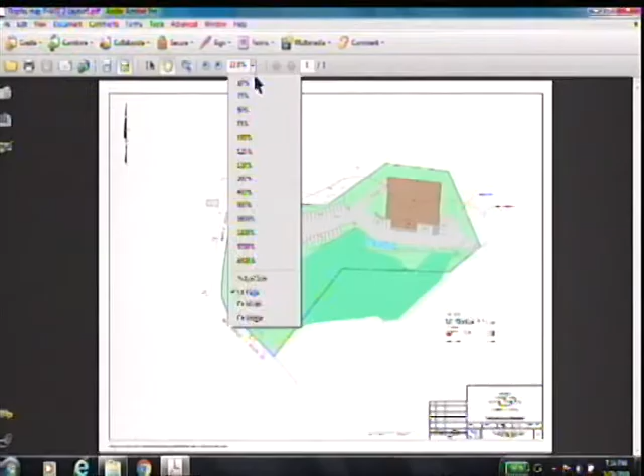What we've prepared is this plan, a very rough schematic of what the proposed building would look like. Again, this is the existing building, the shed, and the pavement goes to this point. Last time we were here, we continued the driveway from here over to the existing road on the Kimball property.

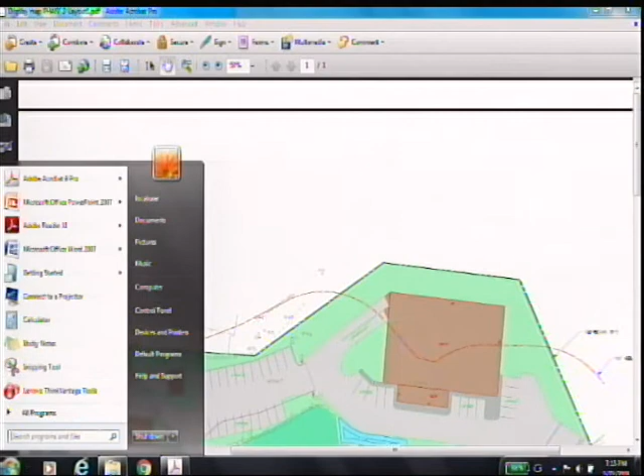I think it's phase 1. Oh, what do you -- sorry, you want me to do it? Okay. And leave the other one over. Okay, so this is phase 1, which would be a driveway following the location as dictated by the building.

What we'll propose doing is we won't do the parking this time, it's not required, that's only part of the second building. We will build this driveway and it will be used in final, but to the extent that this will be only the first course. What we're proposing is sheet flowing the runoff from the road into this water quality basin here, and then the rest will reverse the pitch and put it into a water quality basin here.

The preliminary indications I've done for detention show that by converting this area from the 1984 conditions, which was primarily a dirt driveway with rock outcrops and very little vegetation, to what we will be putting in here, which is grass, the detention is not a problem for the first phase. So again, these will be water quality basins.

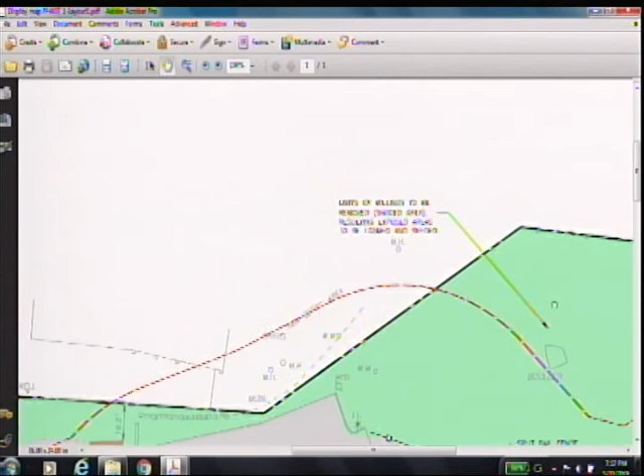The millings we're putting here will be removed, and the exposed area will be loamed and seeded. There will be no parking or outdoor storage in this area. We will put a split rail fence along the northern side to prevent anybody from inadvertently going onto the grassed area.

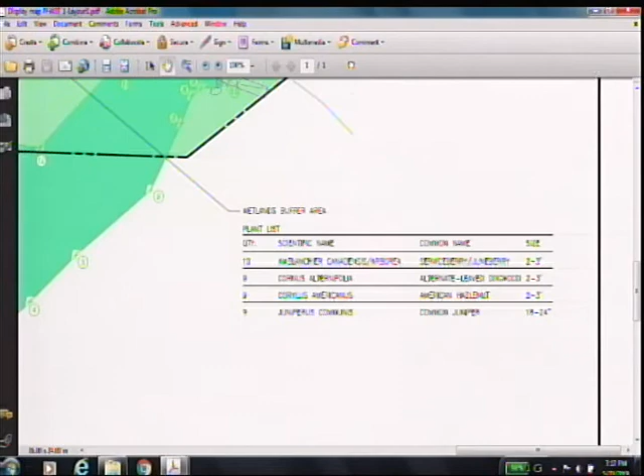Now, this is obviously not complete, but we had Cynthia Rabinowitz come up with a list of wetlands buffer plants that she is proposing to put in there. We will be back at the next meeting to finalize this plan, to have these sited on the wetlands buffer, with the rain gardens properly planted, and a finalized plan.

This again is the phase one plan. What you had said at the last meeting is if this building is not under proposal or construction within 3 to 5 years, we wanted more plantings in here, particularly along the split rail fence. So to this area up here, we will add the 5-year landscaping plan.

Again, this is something we do not expect to be built or planted yet, but we will be coming in with the building, and when we do, that will have its own total landscaping plan. So again, we're not finished now, we have not begun the soils testing required or completed the other work for the building. But what we have come in with is a plan that will be a 3- and 5-year planting plan for the site. What you're seeing here is the initial planting.

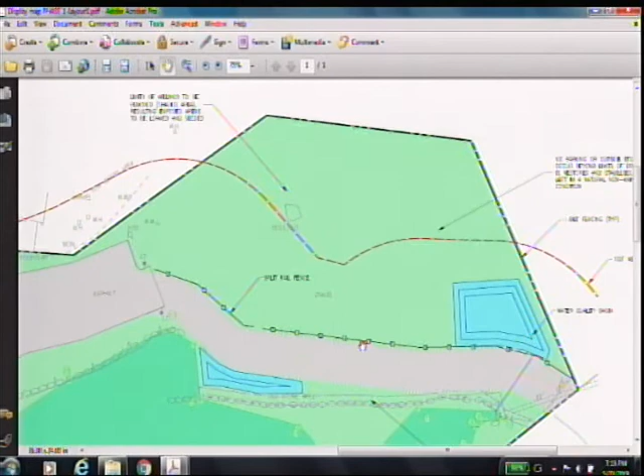Is there any question? The driveway from the asphalt to that area there, what's that material going to be?

Yeah, it'll be a regular structural section. It'll have most likely a bank-run gravel bottom to it, and then one course of pavement, because this is pitched this way to here and pitched that way to there.

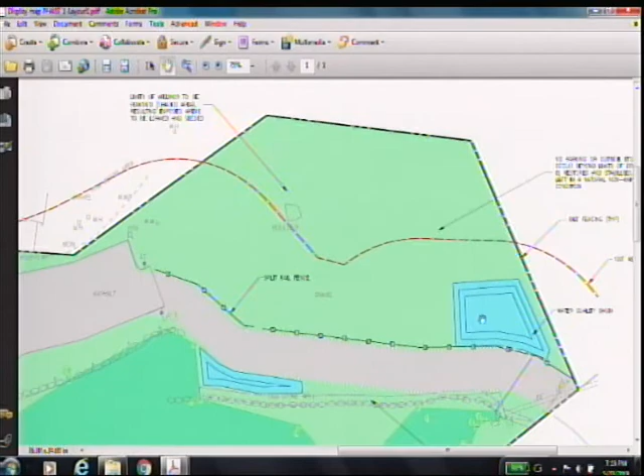This basin will be under the parking lot, so we'll have to get detention for the building. So this would not be utilized for water quality. We will only put the one course in. When we come in with the final plan, we will level this to make the drainage work to get into the detention system and so on. But this will be quite sufficient for the needs - there's not that much traffic on it.

Sorry, could you just take a step back again? You said that for this phase, that sediment basin isn't going to be used yet? This one? No, these two basins will be used with the construction of this driveway. They are water quality basins - more than likely rain gardens or thereabouts.

We will pitch from this driveway from here to here into this one, and then from here to here into that one. There is an outlet pipe that'll come out here and join the riprap at the end - there's an existing 30-inch pipe coming through here, so we'll use that energy dissipator there to take the flow from the water quality basin.

What kind of vehicles would be using this driveway? Well, primarily, it's going to be employees of the facility - which is O'Keefe Controls. But the new building, is that what you're saying? That's going to be the same, for the same use? Yes.

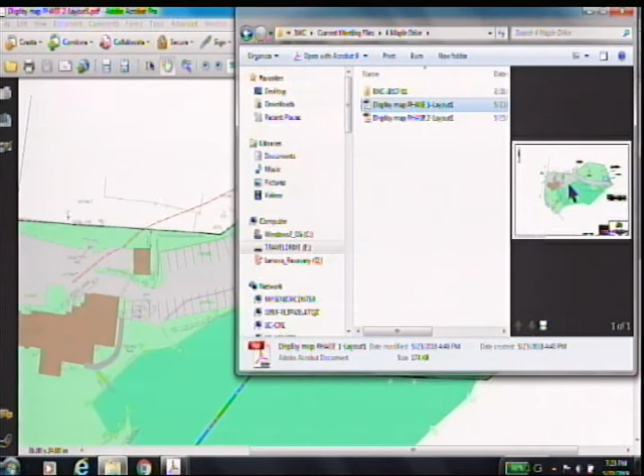So that's the long-range plan, this is, right? Yes, which may or may not happen. It might happen a year from now, or 10 years, or it may never happen. What we're looking at is what you want to disturb and impact today. And that driveway, when you go in to do your other plan, can be moved at that point as part of your next phase plan, maybe to this location. But I don't know why we need to have it right up against the wetland now when it doesn't need to be.

Is it reasonable to build it only once and not build it, then rip it out and build something similar? Well, you're going to put a huge building on there later. There's going to be a lot of earthwork, correct? Not particularly, I mean a lot of subsurface, you're going to be doing a lot of digging. I mean, yes, but it's still a relatively level site with a flat building on it.

I'm just trying to wrap my head around understanding why we should consider a development or the impact to the upland review area right up against the wetlands when we don't have to today. We don't know when that future phase is going to happen.

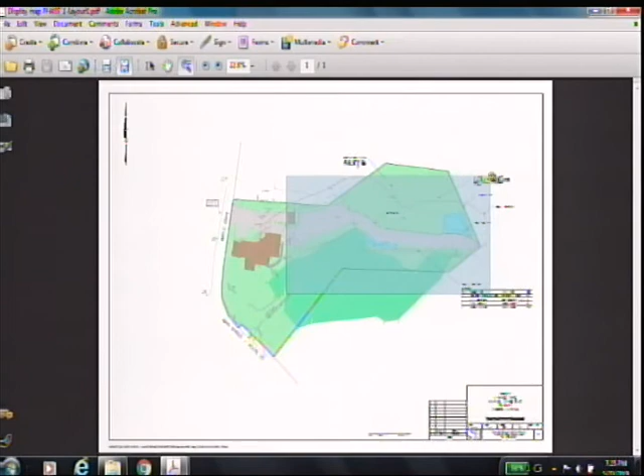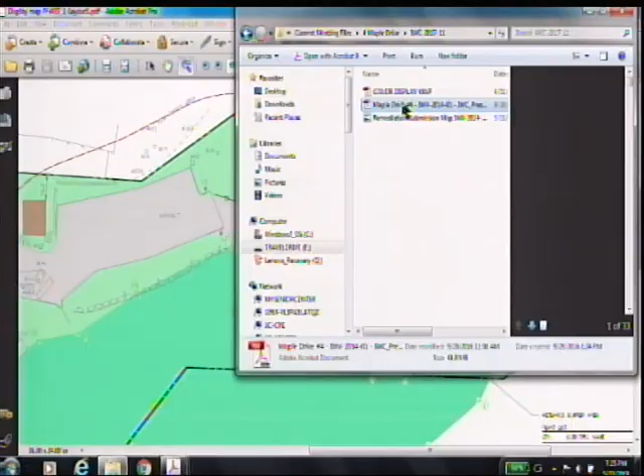Do we still have the pictures of the current condition, was it the last meeting or the meeting before that we looked at those pictures? The photographs, the original pictures showing what it looks like now? Yeah, okay, so was that, can we look at the pictures of where that rock wall is and where the millings are? Yeah, I had those pictures right there on my flash. Oh, you had them, okay. Were there pictures with this?

Let's see, yeah, there's images. There's no ground level, but we could look at the aerial. That is that one right there. So there's your answer, driveway from the other — that's where the driveway's going to start. It's already there.

This is all millings that have been placed in there that we're still proposing. Right, well, that's the violation. The millings were placed there, yeah. It's a violation, right? Right. Well, that's what we're here to remediate. When did you buy the property?

This is the wetland area in here. This is a boulder retaining wall in here. On the downhill side of the boulders, which I have photographs of, this is all multiflora rose all through here and into the wetland. So how much are you moving the new proposed driveway of your phase one project from that milling driveway right there? None at all? No, we are — it is going to come down here more. I would say half the driveway width is going to be closer to the wetlands than what exists there now.

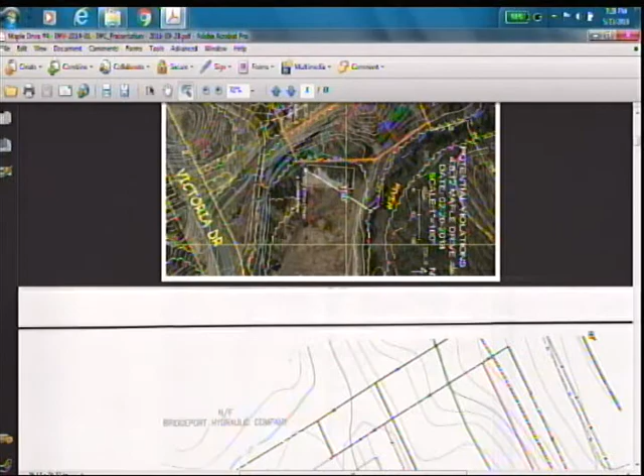Let's see, 2014? IWV 2014-01? Yes, probably January-ish, it's the first one maybe. So it goes back a ways, four years. Well, we started out this thing to bring you up to speed, Jeff. No, I remember some of the discussions we've had.

So it's always been a discussion about what the future's going to bring and how to address this in a fashion that would possibly suit the owner's needs in addition to remediating the violation. The wetlands shown on that one are not the current wetlands. They were reflagged this year by Cynthia.

Rebecca, I do remember that. Is that the plans that we have, November 14th, 17th? No, if it was ours, that has the current wetlands flagging on it, but this is 3/28. Let's see this one, the driveway. No, November 17th may not be in here. Oh, we need that. Yeah, so the plans you have were the plans they came in with the last time you met. Here's the one, received April 6, 2018? Did it come in at the meeting I wasn't here at? Probably, here, take a look. Well, I think this is it.

Where's that one you've been looking at? This one's April 6, 18, that's the one on the bottom. This one you were just looking at before, what's the date of that one? That's the newest. This was the previous one. Okay, right. So you're saying, oh no, this is the one, because it's got both lines on it. Okay.

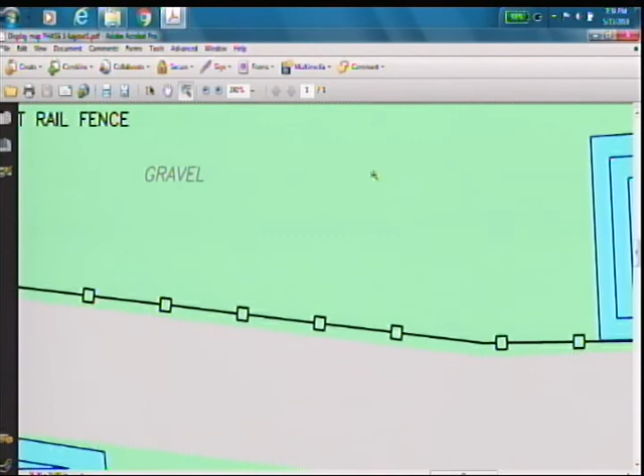Of course we have, you're in the Zoom mode, that's why. Yeah, there you go, these two things for planting grass seeds in here. Now.

That's the short term, that's phase one. Phase two would be if the building is not built and it's more than 3 or 5 years, whichever, we will propose additional plantings in this area to be done at that time, at the end of whatever time period the commission feels appropriate. Can you put phase 2 back up there again, please? I don't know, here, let me take it.

You meant phase one back. No, I just needed to see this one.

Is Cynthia also looking at, as you mentioned, behind the rock wall there's a lot of invasives, a method of enhancing? Likely you could attribute those invasives to the encroachment to the edge, allowing more sunlight and other disturbed opportunist species to come in. Is she going to look at some type of enhancement to the wetland itself along that edge to remove the invasives?

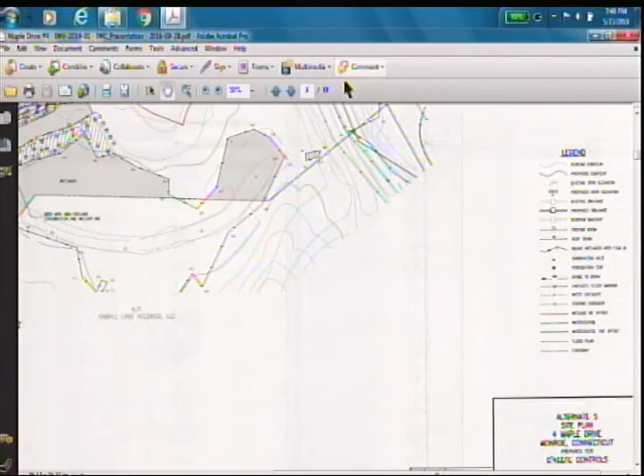And then that area that separated the two patches of wetland was a raised driveway bed that serviced the house, which was on what is now our property. Looks like that's the one we were talking about, the other corridor. Maybe, yeah.

I wasn't on the commission, correct, so my memory is, the encroachment into the wetlands by our parking lot was something less than 300 square feet. Okay? We voluntarily removed that driveway and created another 8,000 square feet of wetland. Is that what you're thinking of?

Yeah, I've seen, why do I remember a trade? If you kept something, you were able to keep something that you wanted, and in trade you put in, you took away the driveway and created wetland. Or it wasn't really creating, it was just exposing it. The trade was, what he's telling you is this area, the wetlands was filled over here, and in response to that, they created this area as a new wetland. That response was a fairly generous response.

We're talking about trading less than 300 square feet for over 8,000 square feet. I remember the commissions were not very pleased with the concept, and we needed to offer something decent, or they were not going to allow us to keep it.

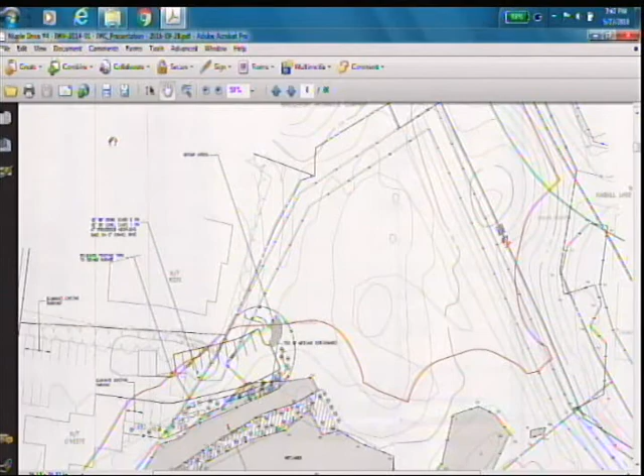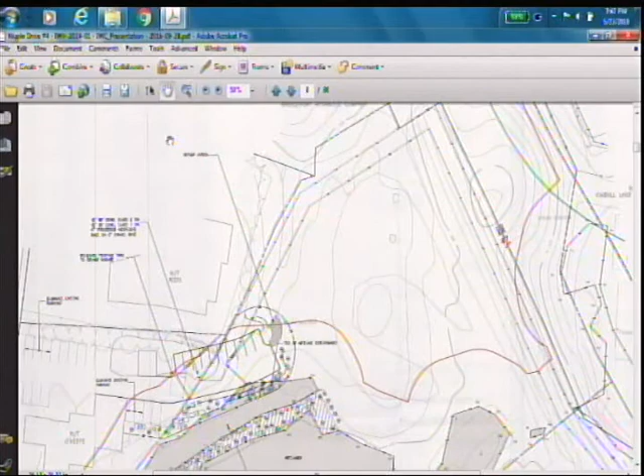This site has been used several times for different purposes, going back to 1984 when the topo was done. We have not done soils testing out there yet. I would imagine what they've done primarily is take the topsoil. I doubt if they've gone down to the B horizon, so it's just bare, no topsoil. So the idea is it's gonna be a wetland grass seed, or whatever the appropriate covering would be. So they'll have to spread some topsoil over the top to get something to grow. Then we'll see it, right?

I know I would be a lot more comfortable if phase 2 had been submitted as an application for development, because it's very hard to see what the future's gonna be. For us to say, okay, in 3 or 5 years, who knows what's gonna happen? In the meantime, you're removing the millings and planting grass, but that's not what we would normally ask for in a restoration. That's where I am a little bit more uncomfortable, because I would like to see something done now.

And if the plan doesn't happen, then at least we're covered. If the plan does happen, plants can be moved, bagged and balled, and moved to a different portion of the property until you're done with your building, that kind of thing. Now, this plan right here with phase 2 does not include any landscaping, any plantings or anything. That's there just to show where the driveway was.

I understand why that's put in, what I'm saying is there is no plan, it's all very ethereal. And I think that what you're seeing there is, you have to start with something. The first question that I asked is, can we fit a building in here which is gonna meet the zoning requirements of the town? So the answer came back affirmative.

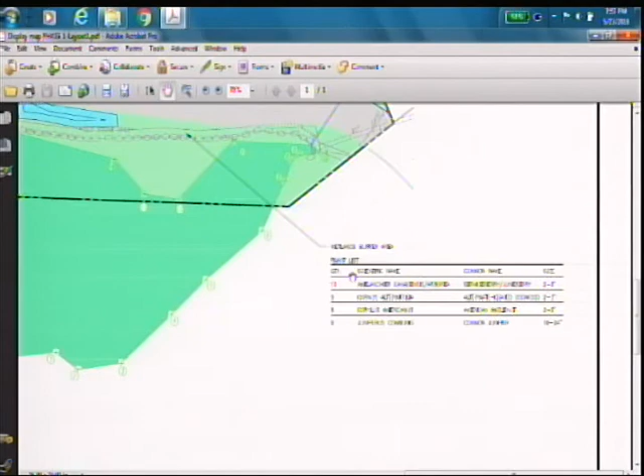Pardon me, but I just got seriously confused because the site plan revised to 4/6/18 that we have in our packet is very different from what you've got up on the screen. Yes. Now we need what you're actually proposing.

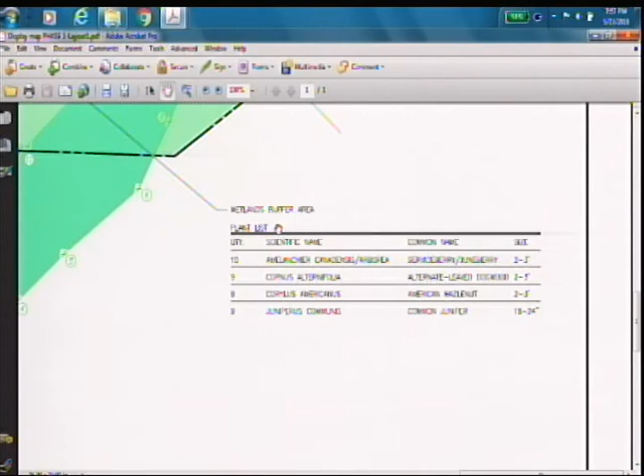No, that's what he's going to do next time. He's submitting something - we will have a different set of drawings. It's going to be different, similar to those, similar in the amount of detail, but it will be for this driveway, not that one. That had several things that Scott didn't like - he didn't like the width, he didn't like the turnout, and a few things like that. So we had to revise that.

There were a number of comments provided to the commission. It's not that I don't like things - I provided some comments, Scott provided some comments discussing the details of that plan, and we discussed it at the last meeting. So we came back and said, all right, they want a two-phase landscape plan. So we're going to come up with why we're putting the driveway where we are, and then the immediate landscaping, and then the landscaping that will be done on this site if the building is not proposed.

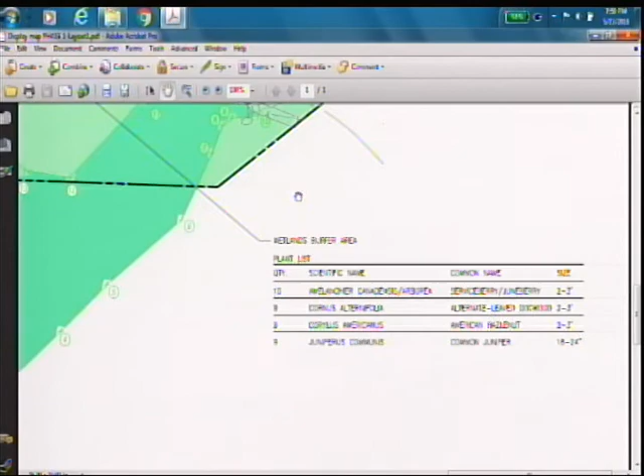Is there gonna be qualifiers, like a time frame? That's what the commission came up with. The commission's timeframe was 3 to 5 years. If action is not taken on the final building within 3 to 5 years, then the additional landscaping would have to be instituted.

This commission did that? Yes. That was the idea of the two-phase plan. I don't remember any of that. I think that was Ross.

I think it was actually Jim, to be honest, but I do remember discussing it. Wasn't it? Jim, for some reason. Was it? He's not here, he gets blamed for everything. Yeah, it was him, and it was Clark. Clark, it was Clark, he wasn't even here.

Might have been me. But that was the idea, that if we put in some plants and if they don't do anything, more was to be done up in here. Now, if the plan's built, then obviously those plans are meaningless.

I think that was a compromise that we, as a commission, came up with. I don't remember it being me, but it might have been. The applicant was discussing how they don't want to spend money putting a bunch of plants in just to be ripped out for the building. The idea was tossed around about putting plants in that they can move to some of these other spots, and that somehow led to the 3 to 5 year timeframe, maybe I said it.

I mean, the amount of time is really kind of arbitrary. I get you, I understand.

You're gonna look at the driveway width and what that really needs to be? That's 24 feet. So at the last meeting, that was the bulk of our discussion. They had a much thinner driveway with a turnaround.

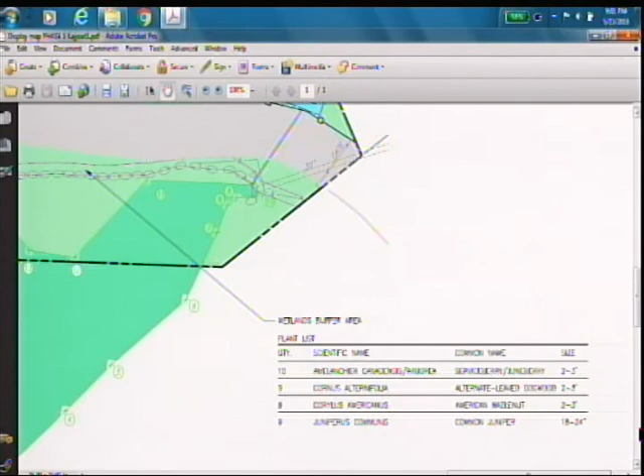And hazelnut too, well, I've never seen hazelnut on a planting plan. Again, we're talking about an area that's relatively limited to right in here. Well, again, we're going to have wetland rain garden plantings in here, so we're really limited to this area right in here.

But you're limiting it to that area. We're not limiting it. Yeah, but again, you know, the reason why we purchased this property, one was to expand our parking, which we did. The second is to be able to build an additional building so we can expand our operations into it. And then the third, which in the short term has actually been the biggest benefit, is the human safety aspect of being able to get from our parking lot to that exit driveway. And don't get me wrong, I'm not saying to push the driveway or get rid of the driveway, I'm saying you're limiting your area that you're looking at for planting to whatever thin area.

There's no reason why it couldn't extend beyond that, and if there needs to be additional plantings or enhancements up to or into the wetlands, that's something that Cynthia, as the wetland scientist, should come to us and say, due to that violation, here's what was affected, here's what we're proposing as mitigation to offset that, as well as improving this area.

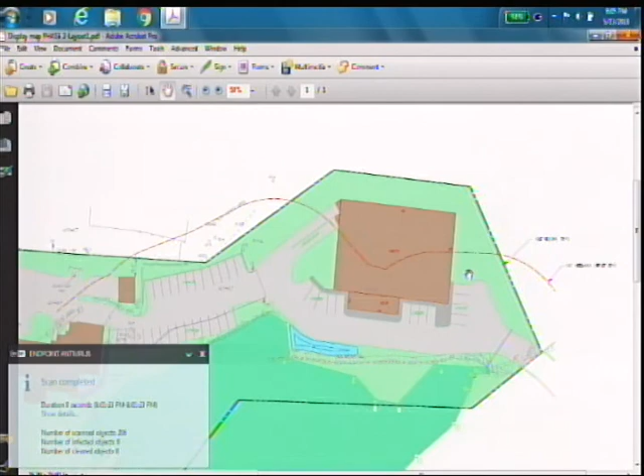I think that's what I would like to see - I would like to see some plantings in that area. I'm trying to be reasonable and work with you too, but we have the equivalent of a naked person up there, that somebody took all their clothes away, and we're trying to clothe them while we're waiting for somebody to go to the store. It's quite a metaphor. It's the only thing I can come up with at the moment. But we have a naked thing that we're left with, and our job is to make sure that it gets enhanced a little bit, while waiting, and that could be another 14 years before the building turns up. In the meantime, we have nothing that is enhancing those other areas.

I think all of this area surrounding it, especially in here and along there, can be planted now. So which plan would that be on - Cynthia's? It will be on the next plan. The next plan, the one we're going to see next meeting? Yes, not phase two - he's taking our direction, making sure that we're all talking about the same thing. And that will be part of the phase one planting, because it's compatible with the building. But the phase two planting will be most likely something along the fence or something in here, so that if the building is not built, we have something on that large area of land.

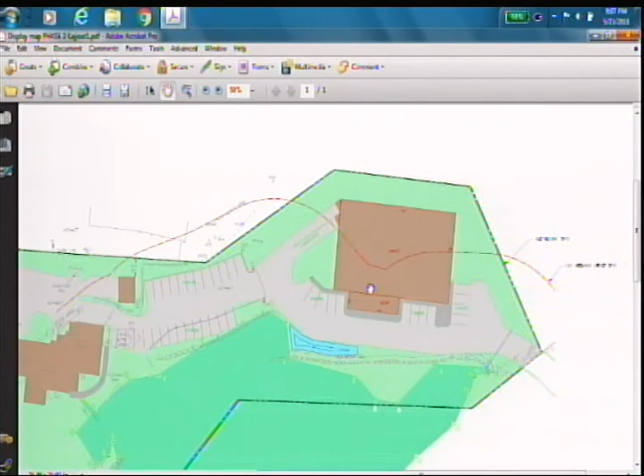Something in here would be planted in phase two, if the building is not done. Along here, this will be planted because it's a rain garden, but this area I don't really want too heavily vegetated at this point, because the only thing that's going to keep invasive species out of here is mowing.

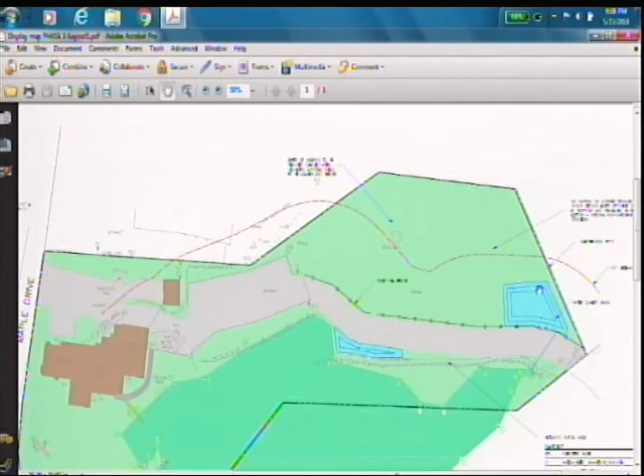We are completely surrounded by the area from here down to the bike trail. All of this area has a huge amount of invasive species, and I want to keep something in here that can be mowed to keep the invasives out. If it's going to be a rain garden or a water quality feature, it has to function as such, and it has to be planted in a manner to meet that quality renovation of stormwater.

Right, before it discharges through the pipe and directly into that wetland, which we will most likely lose when we do the next phase. But we're not talking about larger trees or things like that.

I don't think we can plant even that border with those trees and expect the shade to keep the invasives out. This area is thick. At the last meeting I had pictures showing the stands of multiflora rose, so that's the problem. Nasty stuff, no doubt about it.

And that's where a good monitoring program comes in.

So, to wrap this up, we're talking about permanent, long-term plantings in this area. This will be short-term. This will be long-term all down here and will never have to be taken out, so we can do a little more in that area, and then possibly something along the fence. But keep this as a mowed area.

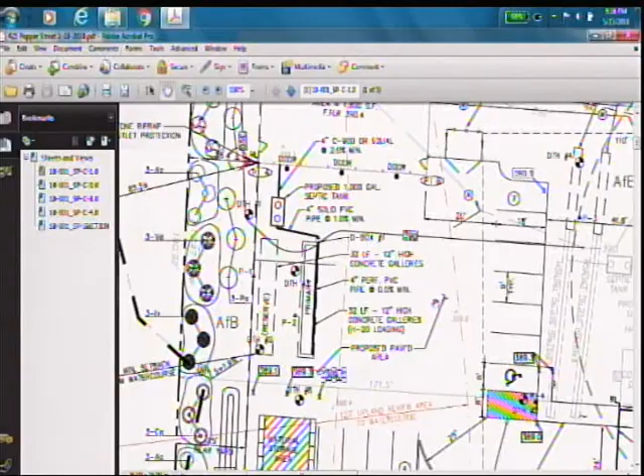Also, in conjunction with that, part of the discussion was, can we do something with the grading to get some of this runoff to actually utilize that area? We put some spot elevations, forming a high point through this area, and that's twofold. One, the concern was raised that previously we were sheet flowing this whole area down into the basin, so water would get into that material storage. So we created a high point in that material storage so we could get water to flow around that and then into the basin area.

With that additional storage, a couple other items we discussed as alternatives: Number one, I believe Mr. Stewart had suggested we put in some subsurface infiltration chambers to collect the roof runoff from the existing building. Again, with the volume in this setup, we don't need that additional volume, so the roof leaders will be running into the stormwater basin area.

Another item we discussed was potentially putting a swale across the top here to divert some of the upper area from getting down into our system. I took a look at that, and the actual drainage area really didn't equate to a large area up here, and to actually grade that out we were getting into a deep excavation as we got toward the westerly property line. So with the volume now available in this basin, that could handle all that flow. We're just allowing that to sheet flow down into our proposed system.

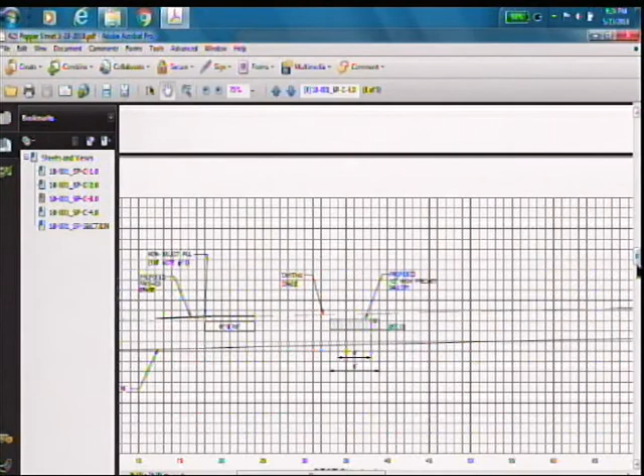What we did here, based on our conversations, was - if I could back up a little bit - we did look at the initial comments from the commission when you received the application to see if we could do any kind of mechanical treatment. So we took a look at essentially putting curbing along that edge where I just said there was no curb, creating a low point, putting it into a catch basin, and then discharging into that swale.

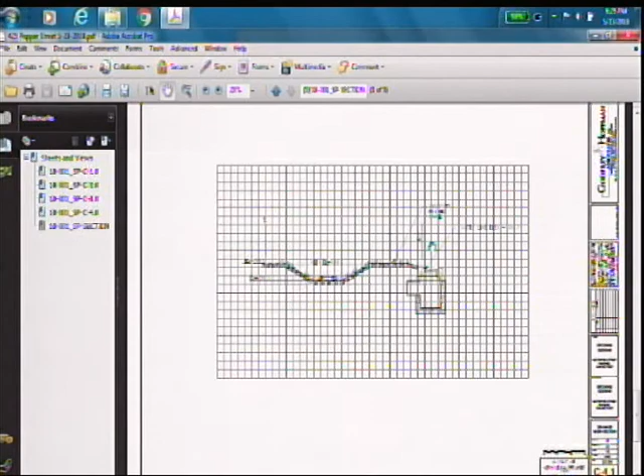Problem is the site is so flat that this is the grade - the grade in the curb line with minimal cover over the pipe. The pipe is lower than the basin area, so we wouldn't be able to discharge in there. Even if we put in a catch basin with some type of filter, rather than a structure, elevations don't allow that to work essentially.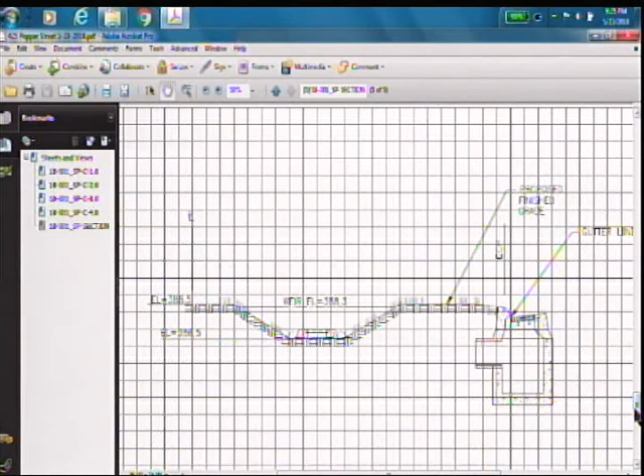So what we did was, the discussion went, well, let's see, can we provide some additional volume? And that brought up the discussion of increasing that swale along the westerly side of the parking area to provide more volume.

Now, to your point where the inlet and the outlet are close to each other - this basin area is going to retain the runoff, and this weir is just about 2 feet above the bottom of the basin. So as water's collected in this portion of the swale and brought into the basin area, it's going to sit, and then it's going to overflow over this weir.

It's all stone? The weir? Yeah, well, it's a stone spillway. There's going to be a concrete lip along here, a rigid lip to protect that, to protect the overflow. Okay.

From a stormwater management, stormwater quality standpoint, I understand kind of where we are on the site and some of the history. What, as a professional engineer, are some other enhancements that we can do to protect the receiving waters from this primary treatment, essentially?

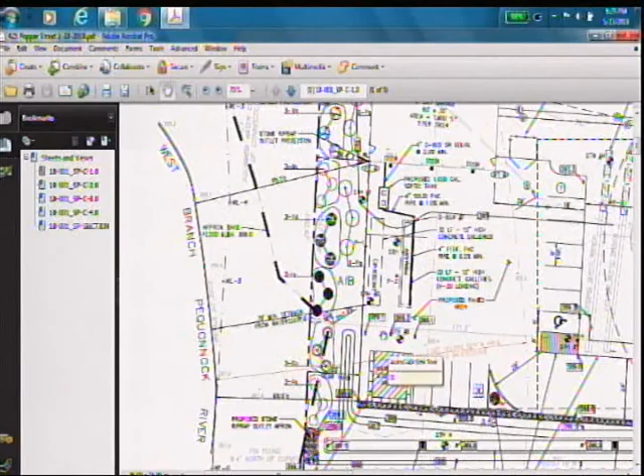I had a question along those lines. There is a line drawn vertically next to the plantings, starting at the base of the finger basin, in between the storage area and the little basin. Does that signify the end of pavement? That's correct. Is there anything - there's no curb there? That's correct, there's no curb. Is there anything else that is there to prevent activity from leaving the paved area and going into that area?

Well, we are planting a buffer there, so immediately adjacent to the edge of pavement, there's not any kind of physical structure. The buffer is significantly to the west of that - I'm talking about directly on that line, at the edge of pavement. There's nothing to stop cars from driving into there. Granted, along the garage, they're not going to be doing that, but in front of the garage there's all that opportunity, because those trees aren't going to be big for a long time, and there's a lot of opportunity for even people to drive into the swale.

I mean, we could line it with some boulders, something - a physical obstruction, a fence, a significant curb. Well, putting the curb in here kind of defeats the purpose of what we were trying to do with the sheet flow, allowing runoff to leave the pavement. Okay, right, I understand that. So I am looking for some kind of a physical barrier to keep that area from being encroached upon.

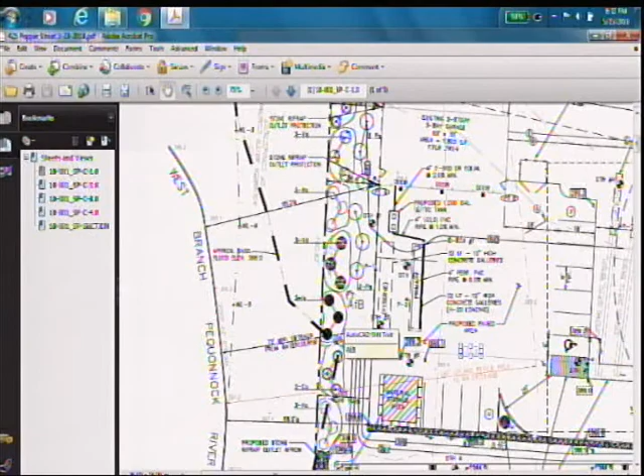Do you have an access point if you needed it for your maintenance plan, to access the basin for sediment removal, emergency response, tree removal? Yeah, it's right adjacent to the driveway, so it's easy access. Even if we do some plantings here, the size of this is of the magnitude where a small machine, a small backhoe could get in there, or even hand maintenance.

Do you have a maintenance plan that is prepared? Yes, we do. Does that include no spraying of herbicides within it? No, we did not include that. Can we please add that to your maintenance plan? We've seen too many rain gardens being sprayed with herbicides. It's not pretty. The type of mix we put in there is something you're not going to maintain on a constant basis. You can only cut it once or twice a year, but we can certainly add that.

As far as maintenance goes, I was thinking it would be more of just hands-on maintenance. Whenever you see any leaf debris or anything building up in there, you're just going to physically get down in there and rake it up and tarp it out. I don't think it requires heavy equipment. Not necessarily. The access is easy enough just to walk down there and clean it up. It just needs a plan of some kind.

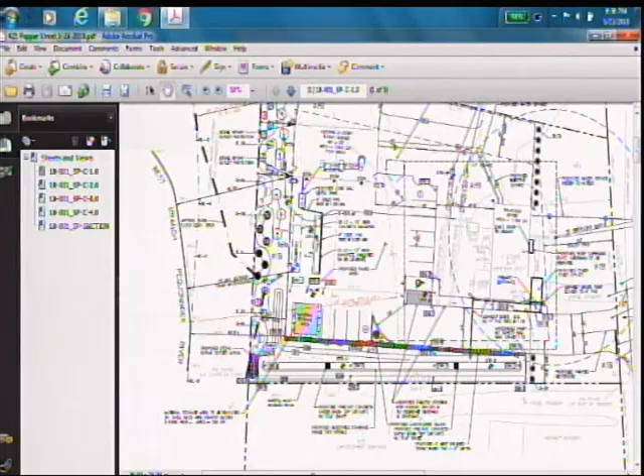What's happening behind the garage? Is that being paved? I was assuming lawn. No, that's all going to be planted. I'm sorry, to the north of the garage. Right now there's a garage that's kind of sticking out, this is 25 feet, this is all planted area, that's all lawn. The whole site, there's the existing building, there's a proposed driveway, proposed parking area in the rear, and the existing garage.

All other areas that aren't shown as the new planting areas or the basin area will be seeded and will be lawn areas.

So to the north and to the east of the garage is all going to be lawn area, because I was thinking that would be an okay area for storage. It's behind the garage, further away from the river, and the garage actually creates a barrier from the downhill flow. I mean, granted, there's not much of a hill, but there's still a downhill flow, so I didn't know how that would work. It's hard to tell without— you've got so many existing and proposed, and stuff like that.

By doing that, we'd have to increase our impervious surface, create a large paved area in the back, and that changes your drainage. And from a zoning standpoint, I'd have to check, but would that be allowed within a setback, Scott, the storage area? Oh, that's right, it's in the setback. Pavement could be an issue if it's treated as a parking area, though uncovered I think it would be okay. But with this footprint, I think it's functional for what Mr. Kidney needs—it certainly wouldn't be practical otherwise. Yeah, that's true. Okay, I just figured I'd throw it out there as a suggestion.

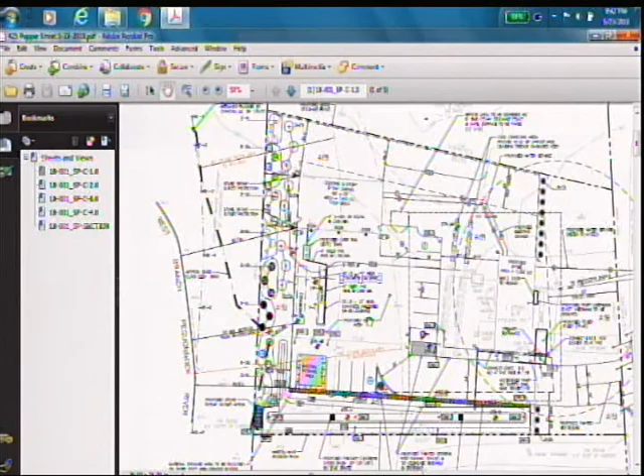That's it, I'm done. You all set? Jeff, yeah, erosion and sediment controls—yes, there's an erosion and sedimentation control plan included in your set, with a stockpile area, that's good.

Is there detail on the containment of the storage area? We don't have one on the drawings. It's going to be concrete blocks. We do have a dimension on the drawings. How many as far as the courses?

We were proposing 2 courses, but I think it was discussed at the last meeting that you may prefer 3, just to give it more containment. That's what I thought I remembered also. Glad you clarified that, thank you, we could provide that.

Well, it just depends on the volume that you're storing there. If it's just a little bit, 2 might be fine. Better be safe, but if we keep going higher and higher...

It's almost like, should we specify a maximum height? Depending on the height, if we say 3 blocks, do you get 18-inch blocks, or 3-foot-high blocks? So what would you think you'd need, like 6 feet high? So maximum of 6 feet high?

I've seen where they stack them up so it might be 4 feet high in the back, and then there's a course down from there, stepping down towards the front, along the sides. Because we don't want it spilling over, that's going to fill up the swale.

Exactly, so I think maybe if we specify a maximum height of 6 feet, and if it takes 2 blocks or 3 blocks to make that, this way we're not locked in. And a minimum of 4? Minimum 4 feet, that's fine.

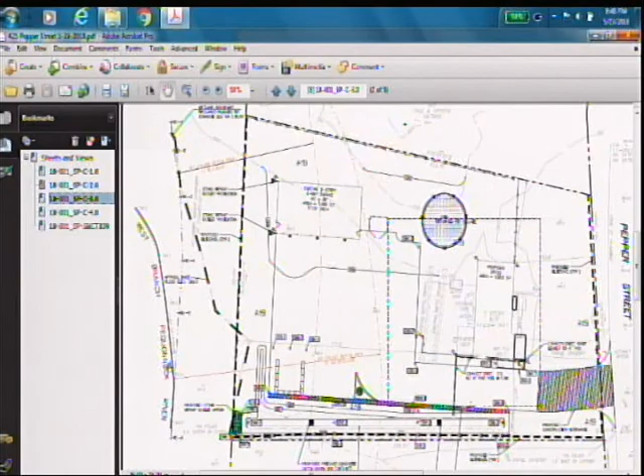Okay, so here's my bond, it should be right with this. Let's just switch. Turn here. Okay.

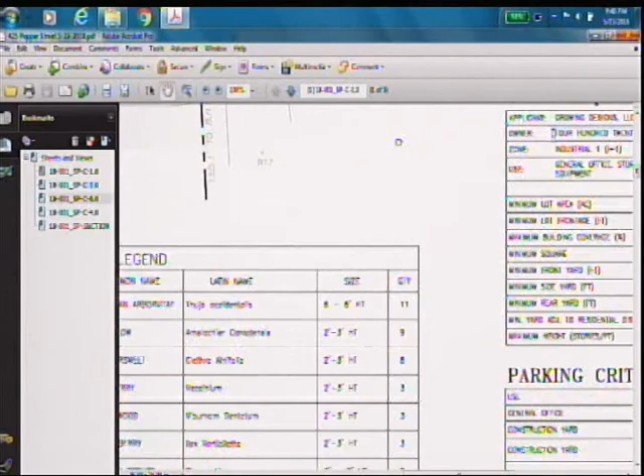All right, so I'm right on the same numbers as you with sedimentation, erosion control, silt fence, topsoil, same number. The landscaping was only $2,500, and I bumped that up 1,000. So there's the other 6.

For the plantings, you know, it was a lump sum item and I felt it was kind of low. I want to show the aerial, the aerial on the westerly side. This is our plant list right here of what's proposed in that area: 3, 6, 9, 17. So there's 26 plants within the wetland buffer area essentially. Along the garage, we have 11 arborvitae, and there's a red maple in that island we have.

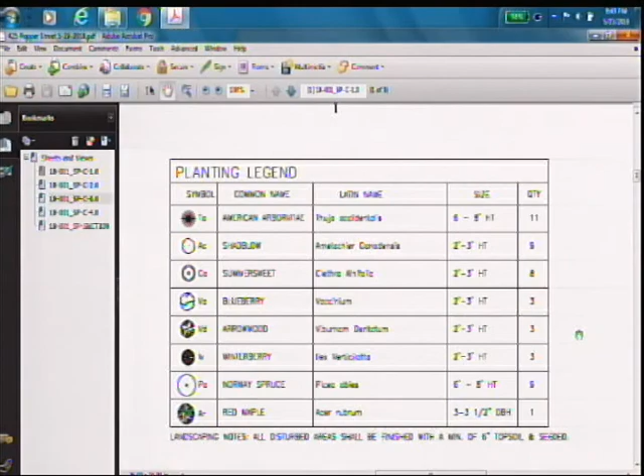That's existing, but we were talking about adding to that. Oh, no, this is the proposed plantings. Understood. But remember, tonight we were talking about adding to that along the pavement edge before it spills off into the basin. Right, at the end, yeah.

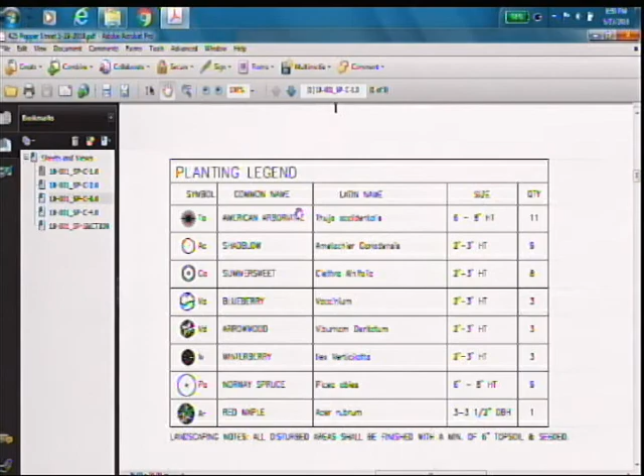I have a question, wouldn't you be better off with some type of turf mix there? Wouldn't that be better than a shrub? That's going to be within the basin area, but right along... even on the other side of the gravel, wouldn't something thicker catch more debris? That'll be on the downslope side of the stone here, and then it'll be a turf mix after that, within the basin.

I don't want to argue with my engineer. I guess my question is, what would be the sense on the other side of that gravel of planting shrubs? Between the pavement and the trench.

What we were talking about was the fact that this is your only treatment on site before the water exits to get to the Pequonnock. What other benefits could we get without using structural or mechanical measures? Wouldn't a ground cover or something that absorbs more as the water runs through it?

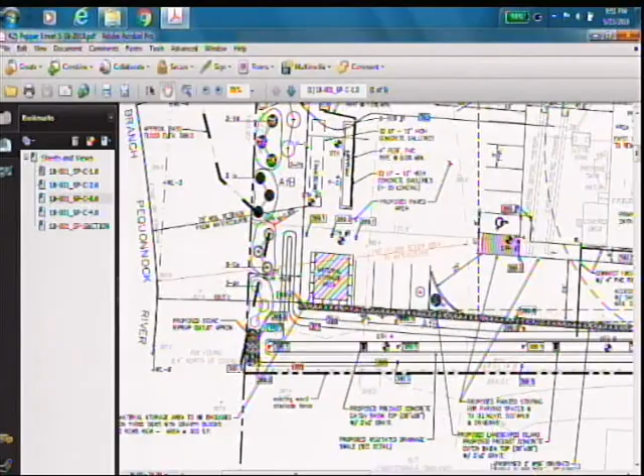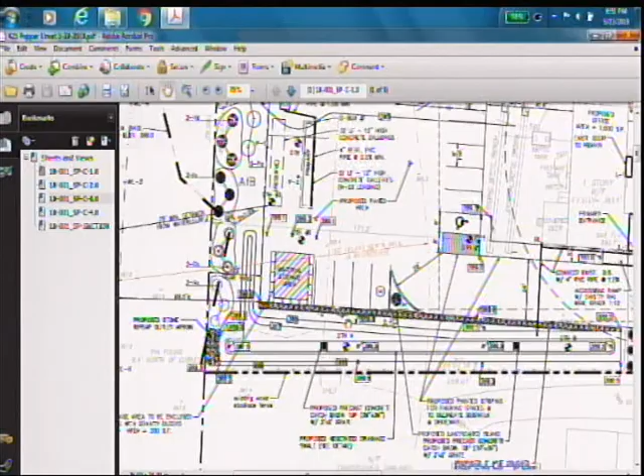I would say both could do more than a shrub. I don't think the shrub would really do anything, personally, but I'm not an engineer. A combination of a grass mix, a good thick grass mix, and having the shrub species there - from a denitrification standpoint, yes.

There are two points really. It was knocking down some of the coarse suspended solids, which the grass could do, and the stems of the shrubs could do. The finer suspended silty soils are gonna go into the basin - nothing's gonna stop that. It's really about knocking down the coarse suspended solids.

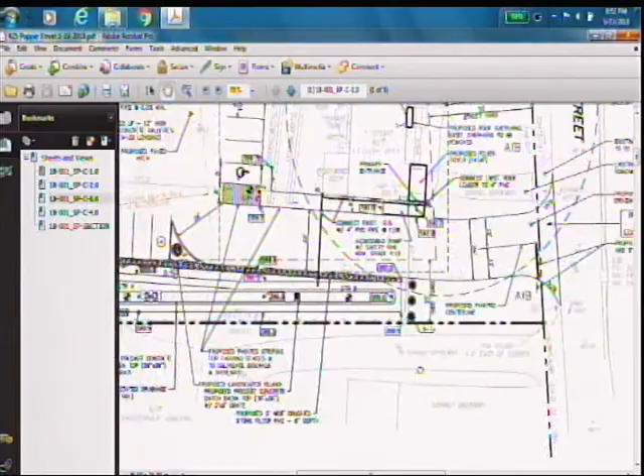So which shrubs would you recommend for that? Along the top, ornamental grasses or something like that. It could be a lot of asphalt, it's gonna have some - that area's gonna cook with so much soil, you know? It's gonna have thick dry stuff.

Do you have any suggestions, Steve? I think the ornamental grasses are a good idea, because they're so thick and they can continue to grow and keep expanding, so they're gonna probably be the best buffer for catching anything running across.

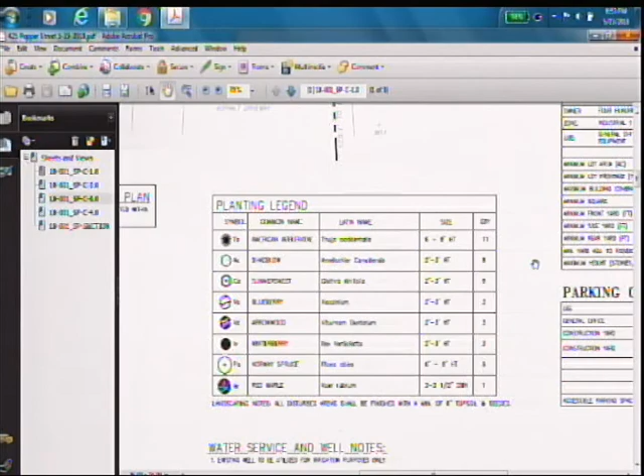That's what I was thinking - if you have a stem coming out of the ground, that stem's not gonna get you much. There's other things depending on the storm event - you could get a greater benefit from the woody plant for the stormwater quality process than just the grasses. But you also get a wildlife habitat benefit for having some of the shrubs there.

I don't know if you're gonna get that with such minimal width - they don't have a lot of room there. I think if it's wider and spread out, you kinda get that, but here they're gonna almost have like a soldier force, that's it.

Yeah, we have about maybe 5 feet down to 0 feet. So maybe just the ornamental grass clumps - if you did like 3 to 4 foot ornamental grasses running along there, with other vegetation running all through it.

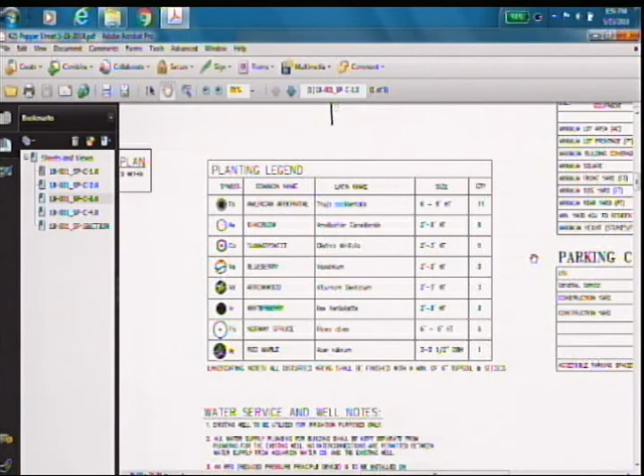Okay, so what did you guys decide on the bond? They questioned the bond, we kind of digressed. So the $6,000 difference was in landscaping, is what you're saying? Yeah, and to be quite honest with you, I didn't compare it with the previous.

So Mr. Kinney also gets a discount on the shrubs, too. Yeah, we look at it as a number that we have to come up with.

Well, when you set your bond, does that include the planting of the shrubs or just the purchase? It's not that exact a science. So, to be quite honest with you, I think the majority of it - the bond legally is meant as a site stabilization and restoration, and in reality it's probably more of a performance situation.

Yeah, right, that's what they have to do. So you're at 16,000, and you already posted 10? I already posted 10 for wetlands and 10 for, I guess it's planning and zoning - that's something else.

What's the stipulation of release of that bond in the future? Well, once all the work is done, then it gets released. If they're too small to be reduced...

That number covers the scenario where he goes in, does some of the work, creates a disturbance, and doesn't finish. The wetlands bond is a whole lot easier to pull due to the legal parameters.

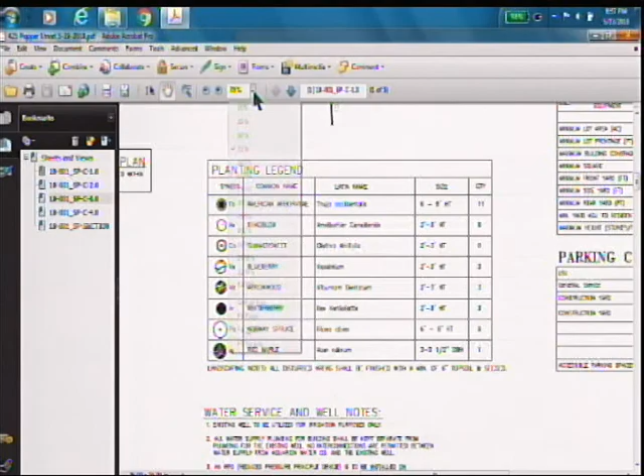What's that? Do we need anything else? Do you want to read the exhibits? Is that what you're pointing at? No, we haven't done that yet. So are you pointing, or were you? Yeah, she was pointing to these. Yes, pointing.

Exhibit number 1 was the previous approval provided by staff, a document dated April 12th, 2007. Exhibit number 2 was a photo of the sign posted on the property. Exhibit number 3 was a test hole report by Godfrey Hoffman, dated April 17th, 2018.

Exhibit number 4 was Aquarian and Health Department notification and abutter notification with corresponding certificate of mailing receipts. Exhibit number 5 was the town engineer comments and bond estimate, dated April 20th with a revision date of April 25th.

Exhibit number 6 was a request to postpone or continue by Jim Rotundo, dated May 9th. Exhibit number 7 was a 6-sheet plan set by Godfrey Hoffman, dated February 27th, 2018, revision date May 15th, 2018.

Exhibit number 8 was the supplemental stormwater calculations by Godfrey Hoffman, dated May 15th, 2018. Exhibit 9 was response to town engineer comments by Godfrey Hoffman, document dated May 15th.

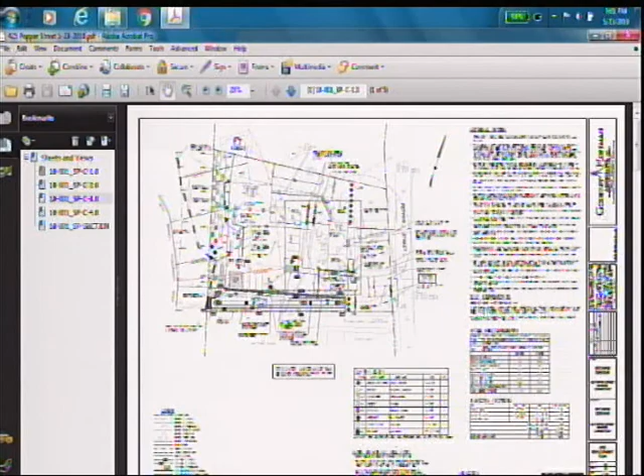All right. Moving on to our enforcement section, post violation discussion, 144 Meadows End Road, filling in wetlands, lawn, and upland review area.

Where are you going there, chief? We did that last week. No, he's right, it's 144 Meadows End Road. Oh yeah, it's right there. That was put on there because you did that last meeting. That's what I thought. When we came up with the drawing and met with the property owner, they had issues with the plantings.

I thought they were going to be here, so they're a no-show, so I don't know what's happening at this point. He called me and said that he wanted to go before the commission and talk to you again. I said okay, I'll put you on the agenda. So I don't know why they didn't show up. But basically, when they looked at it, his comment was that, in his opinion, the wetlands didn't even have that many trees to begin with.

And to put back that many plantings in the area to be restored, he didn't think it was appropriate or fair. So, but he's a no-show, so I'll have to talk to him and find out what's going on.